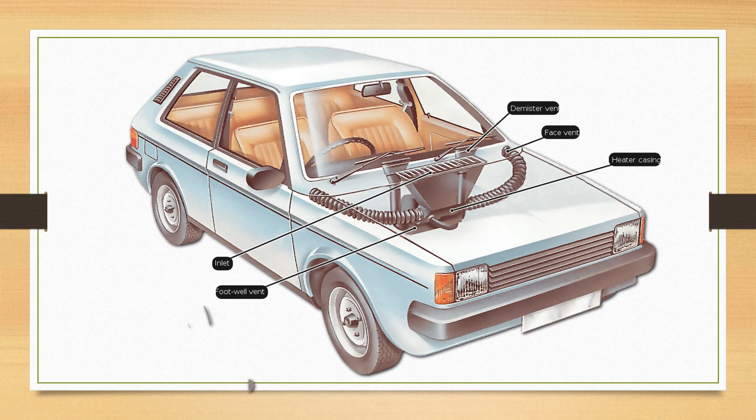Let us begin with a typical diagram of a car. Here in its bonnet is shown a car heating system which has a heater casing, face vent, demister vent, footwell vent and inlet. We'll understand these parts in detail in the upcoming slides.

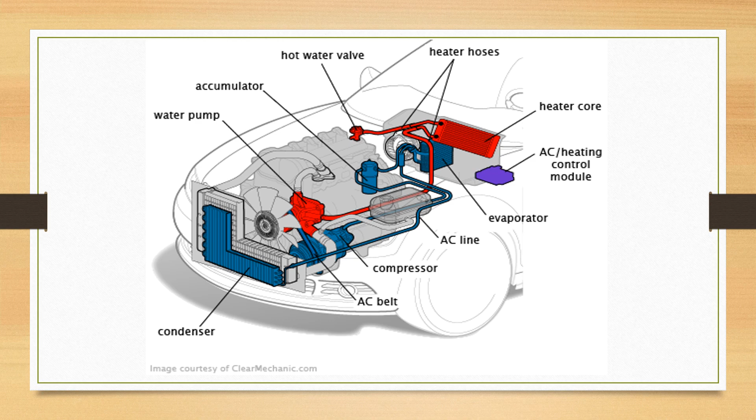Now let us first discuss about a typical car heating system. This is a diagram of a heating system in a car which is well labeled. We'll see this in more detail when we discuss the individual parts and their functioning. The key components of the heating system are a heater core, a blower motor or fan,

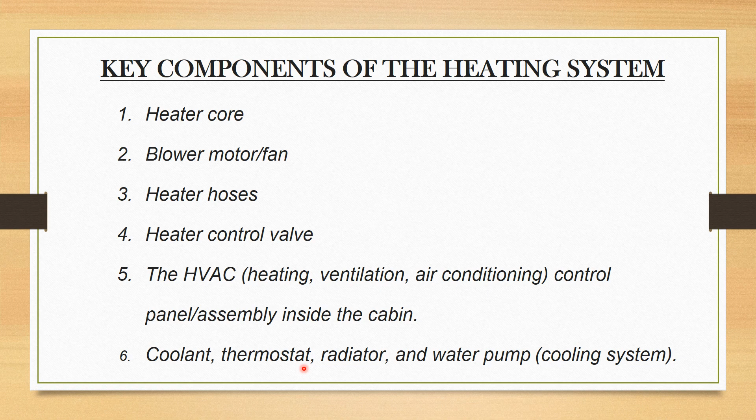heater hoses, heater control valve, the HVAC, that is heating, ventilation, air conditioning control panel or assembly inside the cabin, coolant, thermostat, radiator and water pump, or we can call it a cooling system. This diagram details all these parts and we can see the functioning of each component.

The heater core is like a small radiator that acts as a heat exchanger. It is usually mounted under the dashboard or HVAC housing near the firewall on the passenger side of the vehicle. This component has an inlet and outlet to allow coolant to flow through the core. The blower motor blows air through the heater core and into the passenger compartment of the automobile.

Next is the heater control valve. It is the device that controls the flow of the hot engine coolant through the heater core. It is usually located in one of the heater hoses to regulate this flow. This valve helps control the heater output into the cabin as called for by the heater controls operated by the vehicle cabin's occupants.

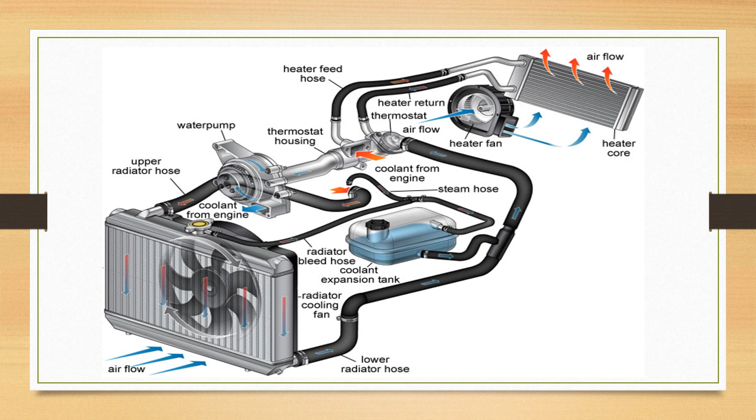Now let us understand how this whole system works. This is a diagram showing the functioning of a heating system. This is a simplified diagram, so let us first discuss it in brief.

Now let us discuss this in detail. The heat that is created by the engine operation builds up and needs somewhere to go. Much of this heat is directed through the exhaust system. The remaining built up heat remains in the engine casting, transferring to the coolant.

Once the vehicle gets to operating temperature, the thermostat opens and allows the coolant from the cooling system to circulate through the engine passages, removing the heat from the engine, sending it into the radiator, and circulating to the heater core that distributes this heat into the cabin of the vehicle.

Now the heater controls and blower fan are operated by the passengers in the vehicle to control how much heat comes into the cabin and at what rate by the speed of the blower motor or fan.

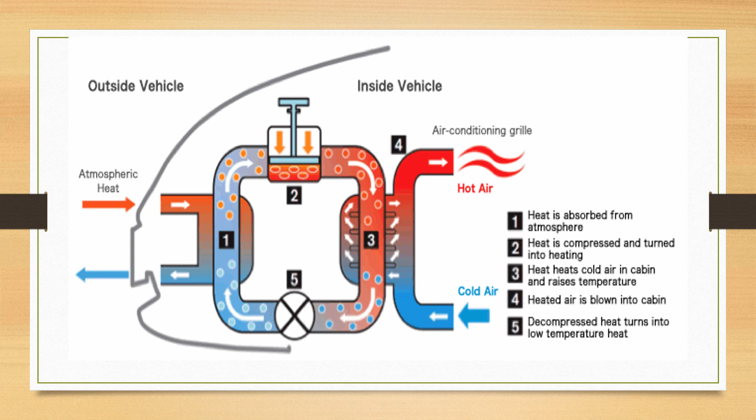Now let us discuss the factors that affect the efficiency of the heating system. The engine cooling system of the vehicle is directly linked to the heating system. Properly maintaining the cooling system is key for the heating system to work efficiently. Having the coolant flushed regularly and refilled with clean coolant water mix is very important, along with repairing any leaks that occur in the cooling system.

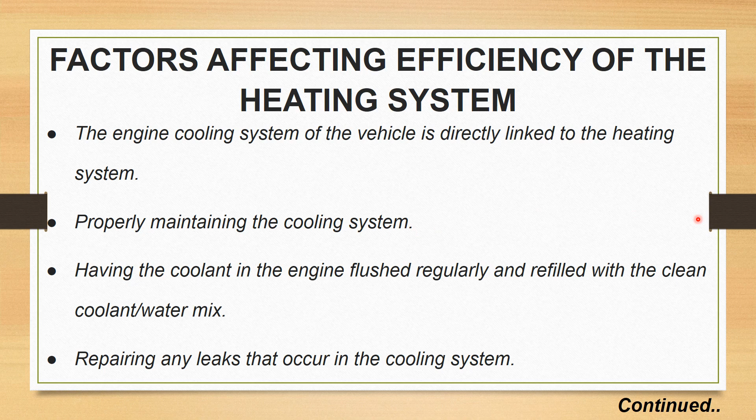Now the coolant being at a full level with no leaks is also very important for proper operation. The thermostat needs to be opening and closing at the proper temperature levels and not sticking, and the water pump needs to be working so it can circulate the coolant through the engine, radiator and heater core. The heater core and radiator need to be kept clean and leak free to be able to disperse the heat from the engine properly.

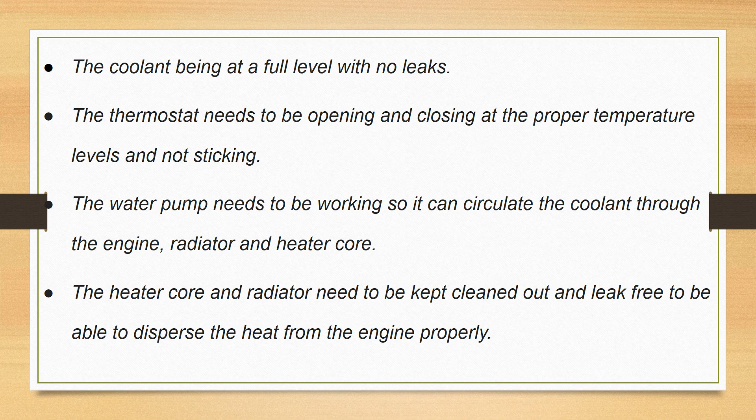Hi guys, now I would explain about the cabin heat transfer subsystem. In the cabin system, the air in the car and the windscreen will be considered. Four quantities or states were identified to be relevant for the objectives: air temperature, absolute humidity, carbon dioxide concentration, as well as the windscreen surface temperature for fog detection.

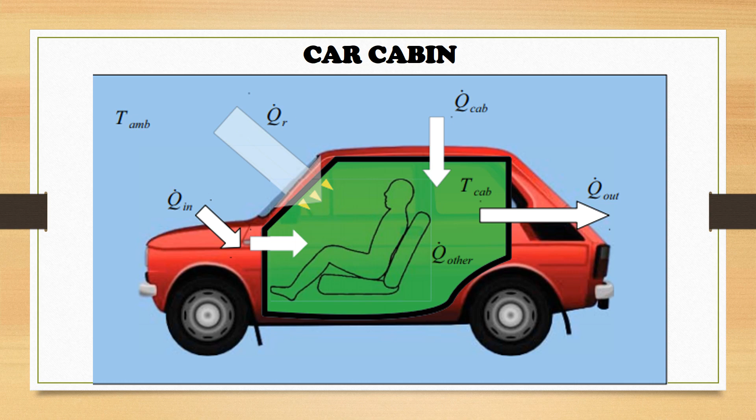This is a typical figure showing a car cabin and the entry and exit of different heats into and out from the system. This is a flow diagram showing the cabin heat transfer subsystem. Now, we will see how to evaluate the car cabin temperature.

In a car, we have first the desired and controlled airflow from the HVAC unit. The amount of air blown into the cabin will also leave it in a steady state. These two heat flows are denoted by Q in dot and Q out dot.

The sources not connected to airflow are the heat transfer through the car body, Q cab dot, and the solar radiation, Q r dot. These two influences can in most cases be regarded as static or slowly changing over one trip. Transient heat sources are the thermal masses in a car.

For heating a car in the winter, a lot of energy is used to heat up the seats, the car body and other parts. This heat source or sink is named Q mass dot.

Other influences on the temperature in the car are often hard to quantify and will be summed into Q other dot. This can be air leakage, the passengers in the car, electronics, or heating from the engine.

There are additional disturbances like open windows or doors which are important to the air temperature. They are covered by others since they are unpredictable and hard to compensate for.

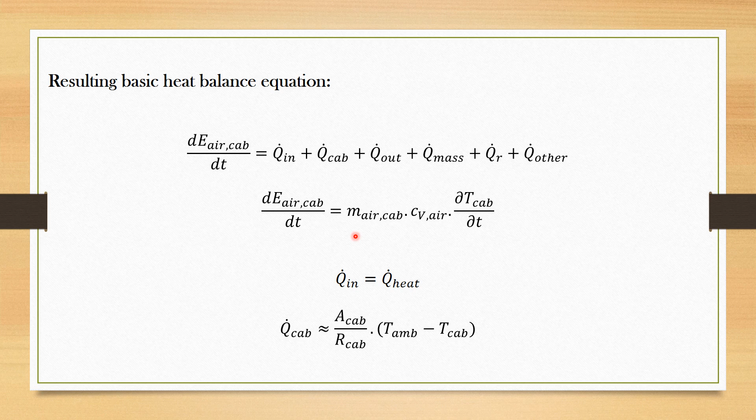Further, Mi dot Ci is the heat capacity of the parts of the car interior and body, T is the time, Q heat dot is thermal power of the HVAC system heater, T cab is the mean temperature of the air in the cabin, T out is the temperature of the air leaving the cabin, Aj is the window area, alpha j is the angle between the surface normal of j and the direction to the sun, gamma j is the transmittance of j, and Q sun dot is the sun intensity.

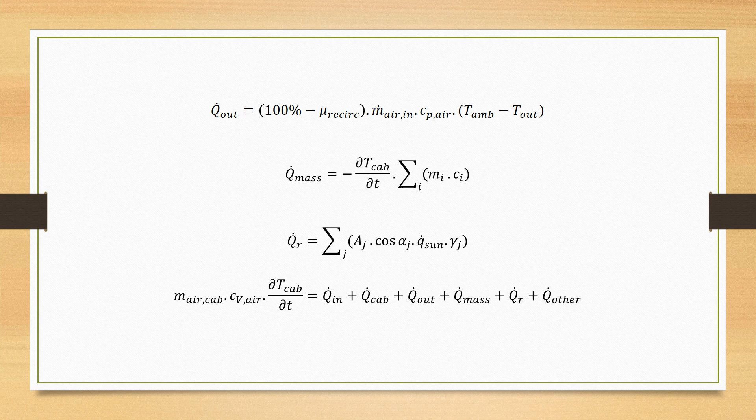Interior parts and the air are assumed to have the same temperature here. This is not correct, however, since the sun's influence heats up the interior much more than the air. If this was considered, a more complicated model would be required, introducing the surface temperature of the interior as a new state.

The outlet temperature T out will be simplified, set equal to T cab. Different approaches to estimate this temperature are suggested, but they are only valid without recirculating air and for standard car layouts.

The heat transfer of the car, A cab upon R cab, can be calculated by summing up the contributions of all the cabin parts. So, this is the equation: A cab upon R cab equals the summation from n equals 1 to n surfaces of the terms.

While the thermal conductivity K, the material thickness D, and area A are usually known and constant, the convection heat transfer coefficients on the outside H cab out and inside the cabin H cab in depend on the airspeed. Literature gives us the approximations for those correlations: H cab in is proportional to the mass of the air to the power of 0.5, and H cab out is proportional to the velocity of air to the power of 0.8.

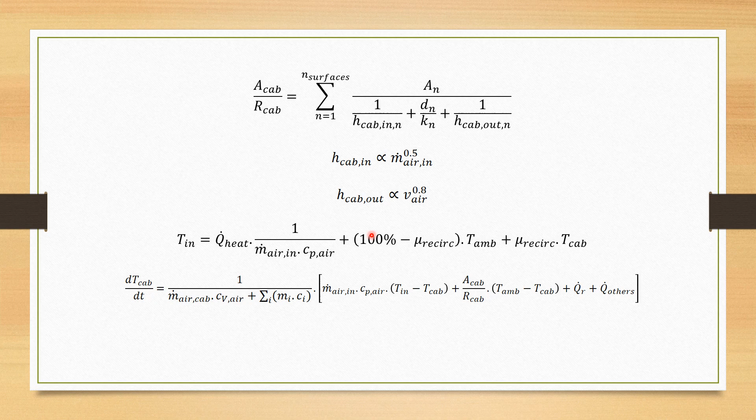Now we will discuss energy efficiency. Because of the heat transport, a heat pump can produce more heat energy than it consumes through the compressor in the form of electricity. The efficiency is therefore indicated by the so-called coefficient of performance, COP.

It is defined as the energy Q heat delivered in the heating case divided by the electric energy W compressor consumed by the compression. A physical upper limit is given by the ideal lossless COP of a Carnot process.

So this is the equation for heating: COP heating equals Q heat upon W compressor, which is less than or equal to T sink plus 273.15 degrees centigrade upon T sink minus T source.

And for the cooling case, the extracted heat Q cool is compared to the compressor energy, and an upper limit can be given by the ideal process, here is the equation given for COP cooling.

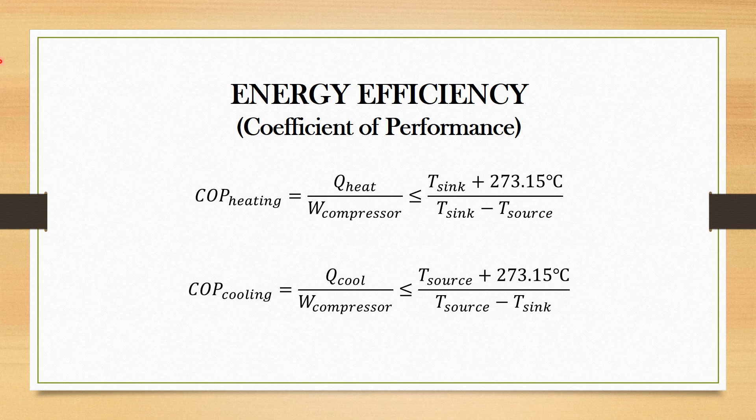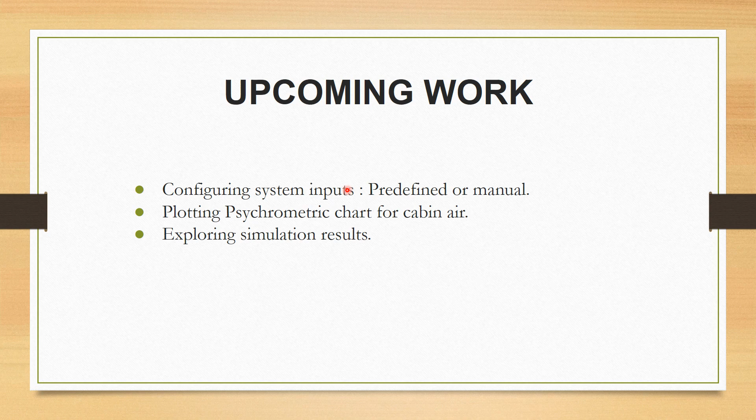Now, in our further work, we will configure system inputs, that is predefined or manual. Then we will plot a psychrometric chart for cabin air, and we will explore finally simulation results. And this can be explained as we will discuss heat balance on the heating system. Then we will determine variables which can affect efficiency like humidity and mixing of air, and we will see how to maximize energy efficiency.

Then we will understand reduce, reuse and recycle, that is where and how these three R's can be applied to maximize efficiency. Finally, we will perform a theoretical study of installation of special equipment which can save heat energy, which will be followed by design of a control algorithm for an energy efficient heating system.